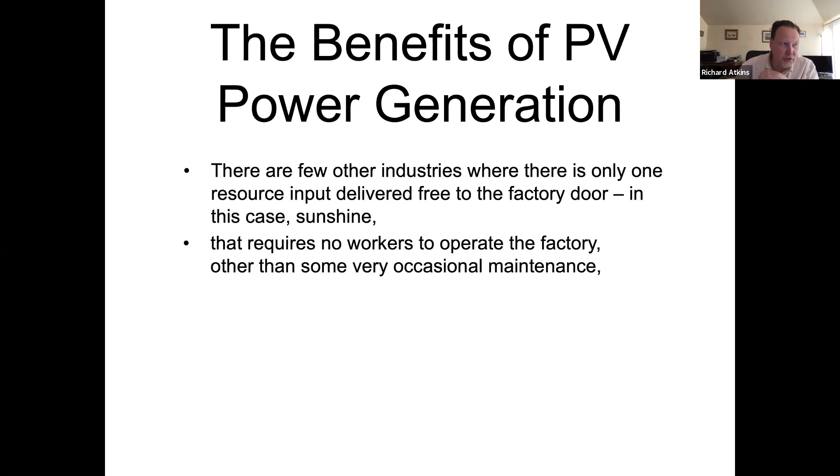So let's start at the beginning. In terms of photovoltaics, it's a fantastic industry when you think about it. What other industry could you be involved in which your raw material, sunshine, arrives free at the factory door? You don't really need a workforce, just occasional maintenance. You don't have any cost to transport your product to the customer. There's no sales, no advertising, you don't need a guarantee. It's unlikely to be returned, and it's very unlikely to fail in use. It's all really good news.

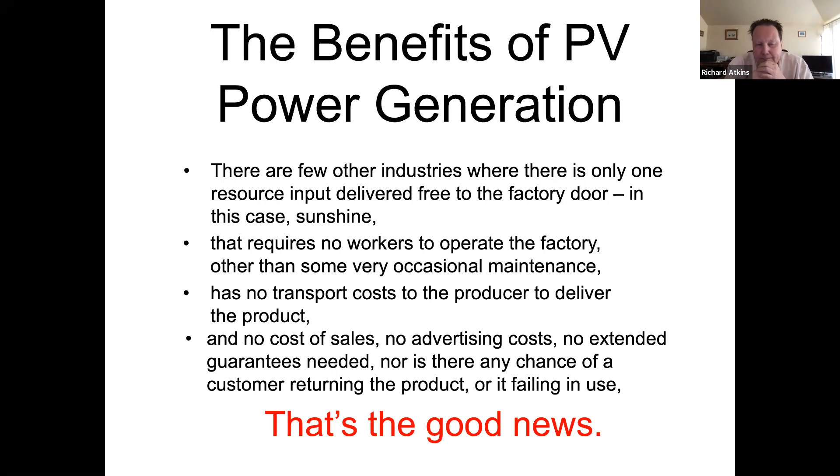But as I was starting to say before, we need to think a little bit about the statistics that go with this, and we'll delve into some of those, all of which are potentially open to question. They always say the only thing you can prove with statistics is you can prove anything with statistics, but I think it's particularly true in the electricity market, which is highly dynamic. The carbon footprint of generation is reconciled every half an hour in the electricity industry, but it's transforming radically over time, and many of the numbers I will be giving you will, by definition, have been out of date when I found them.

Oops. And of course, most statistics are made up anyway, aren't they?

So let's think a little bit about the energy payback period for PVs. I'm hoping two other speakers, Charlie and Emmanuel, will be able to flesh some of this out, because I'm presenting numbers I've found. They're always open to challenge, and we should invite that challenge, because it's all about understanding more, finding out, and keeping up to date. I suppose keeping up to date is the main point I want to make.

So how much energy does it take to make some PVs? Well, for a 1 peak kilowatt array is probably 4 panels, maybe a little bit less than 4 panels. Panels will go from about 250 watts to, you can get them up to 500, but the common ones are around about the 300 mark.

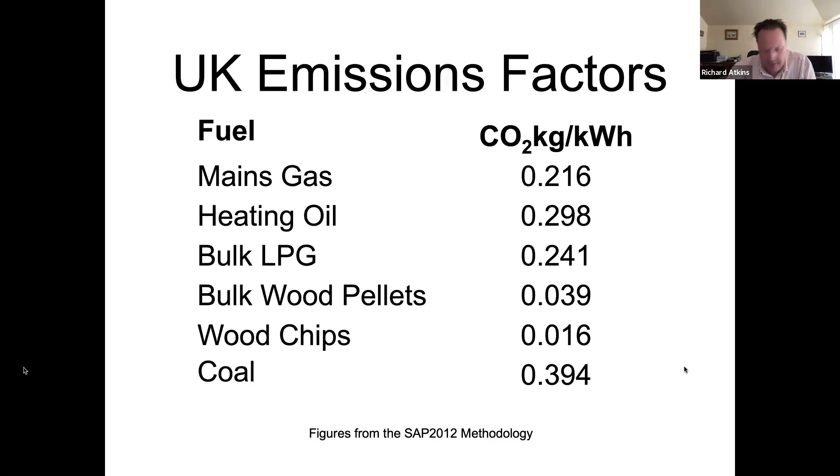But what about electricity? And this gets a bit more complex. So according to SAP, the carbon footprint is about 0.5 kilogram per kilowatt hour, and we're still using that metric. You can see that's from SAP 2012, which is already 9 years old.

But that number was set probably a few years before that in the consultation. There was a consultation on the next version of SAP, which will come in with the next version of the regulations, in fact about 3 years ago, and it suggested more than halving that. There's been a more recent one, which has suggested halving that again.

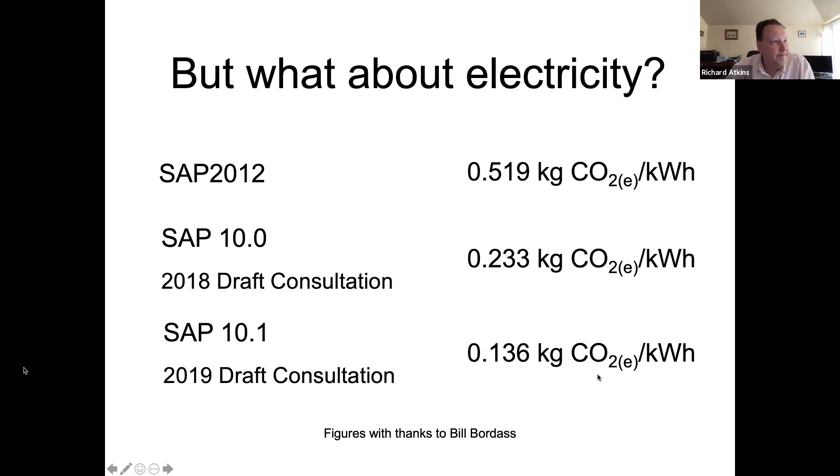But what are the figures in reality? Well, according to the UK government, the most recent numbers I could find from 2019, so again already out of date, it is not far away from what was originally proposed in the next version of SAP. For Scotland, however, our grid, and this is a 2017 figure, is about 1/10 of that. So the Scottish grid is virtually decarbonised already.

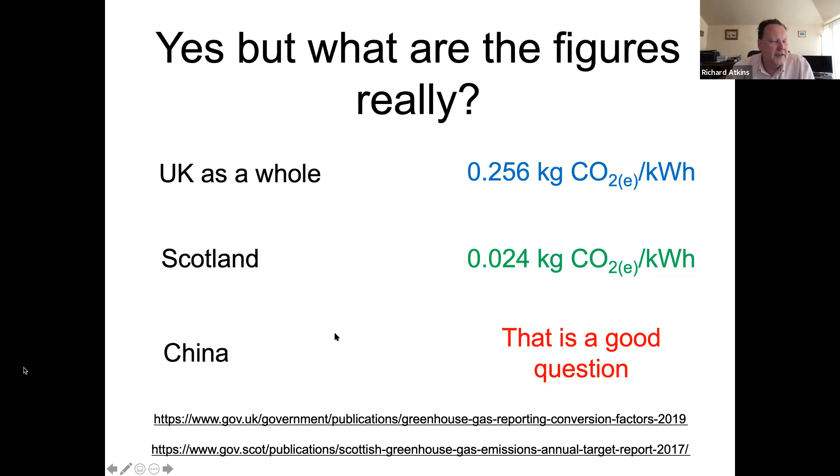What about China? Well, that's a good question, and I found finding the answer to that quite difficult. Why am I interested in the carbon footprint of China or the Chinese grid? Well, I think 2/3 or possibly more of the PV panels produced in the world are currently produced in China.

I did manage to find a paper from 2020 which was looking at the makeup of the electricity grid in China, and that suggests that their electricity grid is about 3 times as heavy, if you like, or has a footprint 3 times the size of the UK grid, which is about 30 times the Scottish grid.

Now, of course, that doesn't necessarily mean that PVs are made only using electrical energy, and I'm hoping that Emmanuel in particular might be able to throw some light on that. But it does suggest that it's a considerably greater carbon footprint.

And of course, if you do the multiplier of that, you get to a fairly frightening 145 years if you're comparing the CO2 emissions factor in Scotland with that in China. Like I say, all of these numbers are open to question.

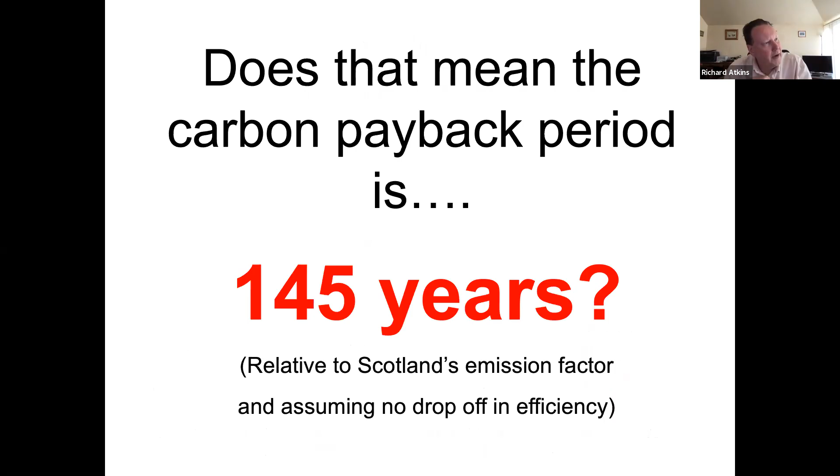I might be out by a factor of 2, 3, 4, 5, who knows. But one of the points I want to get across is we don't have time for a payback.

One of the things that particularly exercises me is when you see lovely architectural projects where somebody says, I've decided to build myself an eco house—a term I absolutely loathe. I'm building it out of concrete, surrounding it with polystyrene insulation, putting PVs on the roof, and therefore I'll have no energy bills and create no carbon. Isn't this wonderful? I look at that and think of all the carbon emissions associated with the concrete, the polystyrene, and the PVs. You may have a zero emissions building in use, but you could have a payback period of 10, 20, 40, 100 years.

If you think about the carbon footprint of electricity for Scotland, it's potentially an infinite payback period. You're actually putting a lot of carbon into the atmosphere right now, and right now is when we don't need it. We don't have time for that payback.

Scotland exports around a third of its near zero emissions electricity. So in a sense, do we need to do any more? Well, yes, certainly, because 78% of the energy we use in Scotland is still fossil fuel based, mainly for heating buildings and transport. Even though we have a very low emissions grid and we're not using all the electricity inside Scotland—and that's another debate about whether we should count just Scotland, or the UK, or Europe, or how big your grid gets—we actually still need more.

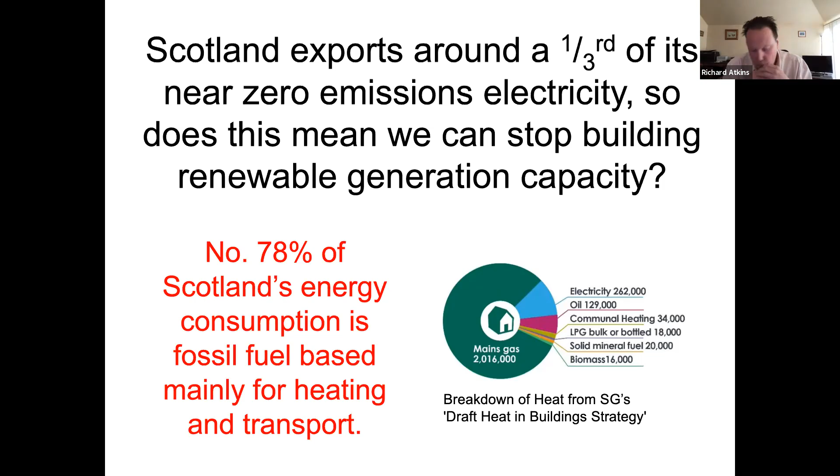So should we just meet that with wind farms, tidal, and hydro? Well, yes. Equally importantly, we should make buildings and vehicles much more efficient.

But there are two other factors. Firstly, the district electrical network was never designed to distribute that much electricity—it was built on the basis that most homes would be using fossil fuels. There's a very great danger the network goes bang if you try to put too much electricity down it. So we do need PVs, and we do need things like electrical storage and other forms of heat storage in homes, in order to smooth out the demand and supply curves, so we're not pushing more power down the network than it can cope with.

But also, all those other things have their own embodied carbon footprint. A wind farm requires to be manufactured and installed, and the same with tidal. If you put insulation into a building, some forms may have an element of carbon sequestration, if you're happy to accept that argument. But a lot of insulation—probably the majority currently used for retrofit—has its own carbon footprint.

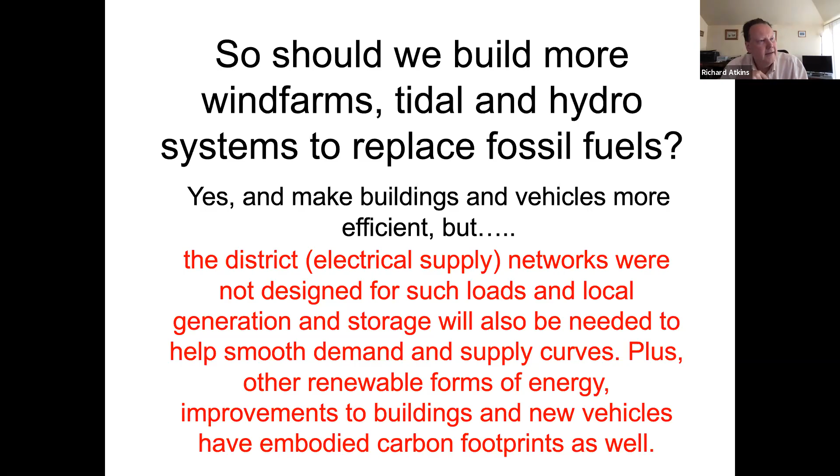So PV still has to be part of the solution. But are there other paybacks we should be looking at? Well, energy, to my mind, is obvious—partly because it's less complex than carbon, since you've taken out the carbon emissions factor for the energy used to manufacture things in different places, move them about, transport them, bring them to the UK, and put them on the roof.

Intuitively, it promotes more efficient panels being made more efficiently. I was reading an article recently suggesting that one of the issues with the market dominance of PVs coming from China is that, because the cost of PVs has gone down so significantly—which on one level is great—it's been a disincentive to develop more efficient panels. So this article was saying less research and innovation is being done to make panels more efficient and to make them more efficiently.

And that may well—Emmanuel may come on to this later, and also in terms of Charlie's talk later, regarding the waste streams that come out of existing and future panels—what's the implication for that?

Are there other paybacks we should look at? Well, carbon, yes, absolutely, possibly. But I would suggest, because I've been asked to provoke a debate, it shouldn't be the global carbon print, it should be the local carbon print. So we shouldn't be looking at the embodied carbon of what is your average PV on the planet, it's where does this particular panel come from and what's its footprint.

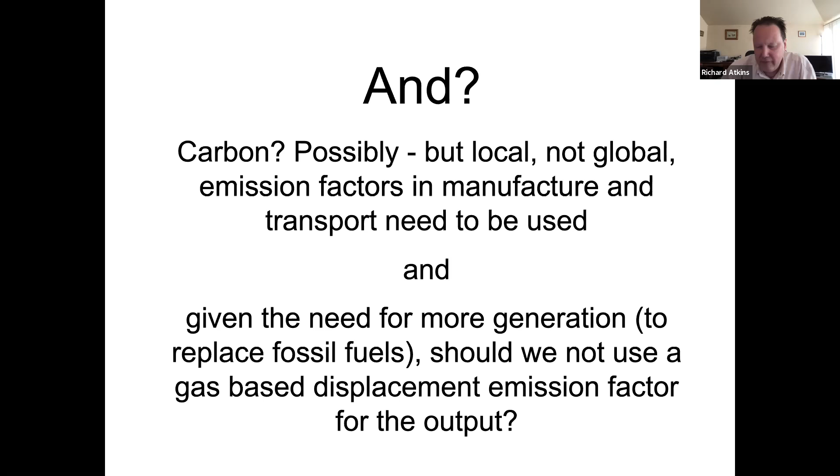Is there anything else we should be thinking about? Yeah, toxicity. It might well be that Charlie and Emmanuel pick up on this in their talks. I don't know the answer to this, what the embodied toxic load of a PV panel is relative to the fossil fuels we're displacing. Cost, well, yeah, obviously cost, and yes, I will come back to that very shortly.

I've only got about another 2 or 3 minutes to go, so I'm nearly done, you'll be pleased to hear.

I think there is more. What's the embodied economic benefit? This is questioning, there's certainly a value in creating an industry for people to manufacture PVs, supply them, and install them. It is creating jobs, but are they good quality jobs? Are they high value jobs? Is the economic benefit being well served, if you like? So that could be a positive or a negative embodied attribute.

You could argue the economic benefit of purchasing and installing PVs is not dissimilar to carbon sequestration of using timber in buildings. It's an activity that's happened which in itself is actually of benefit.

Still more. What's the embodied opportunity cost? Few people talk about opportunity costs, but this is, well, if people weren't in those industries making PVs, could they be making something else that would be more beneficial? Again, it could be a positive or negative attribute. I'm not suggesting I have the answer to this, but I think it's a question worth exploring, bearing in mind if you're in the position of specifying PVs.

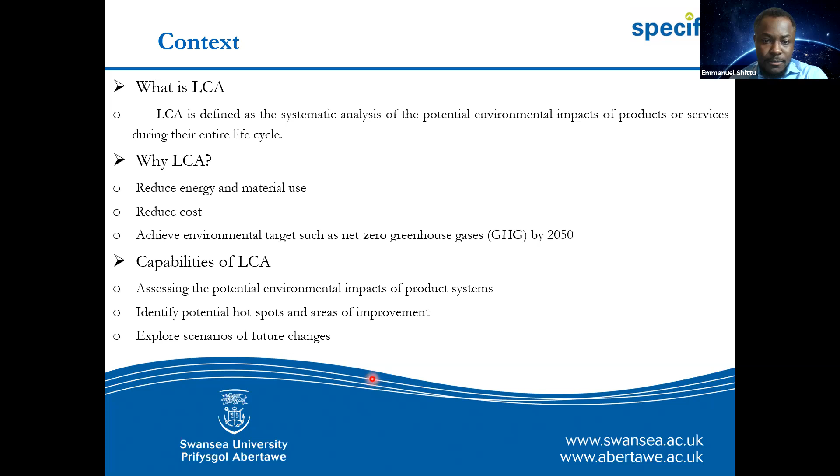So how does LCA work? Just a brief overview: the different life cycle stages usually start from raw materials extraction, so resources, which is within the life cycle inventory, through to manufacturing processes, consumption, energy use, and also recycling, if you include this within your product system.

And then these emissions are what we call a life cycle inventory, such as if we look at global warming specifically, we have greenhouse gases, which include carbon dioxide, methane, and nitrous oxide, and other compounds such as chlorofluorocarbons. These emissions are then aggregated to what we call impact potentials. In this talk, I'll be looking at global warming, specifically global warming potential. So all of these emissions are aggregated to what we call global warming potential.

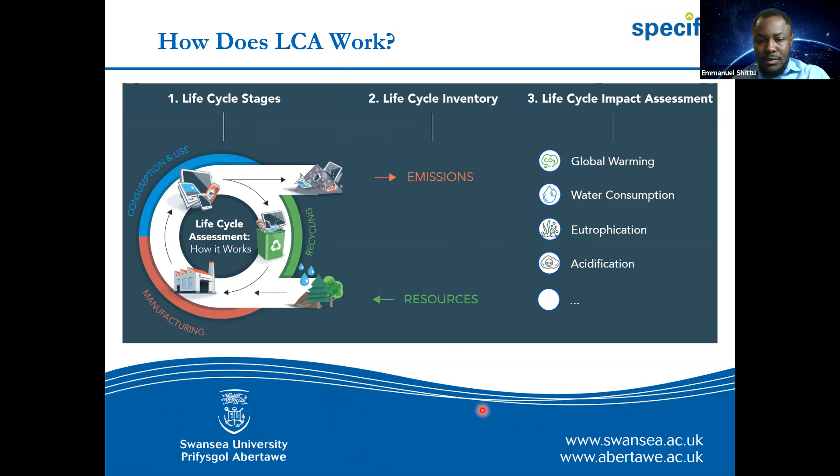The international standards of LCA are these conjoined standards, 14040 and 14044. Essentially, it involves 4 stages of conducting LCA. The first stage, goal and scope definition, is defining the aim, the product system boundary, and the functional units being analyzed - for example, PV delivering 1 kilowatt hour of energy or electricity delivered.

Inventory analysis is when you analyze the material inputs and energy inputs into the system, which are aggregated into impact assessments such as global warming potential. And then the interpretation depends on what the person conducting the analysis is intending to do with these results.

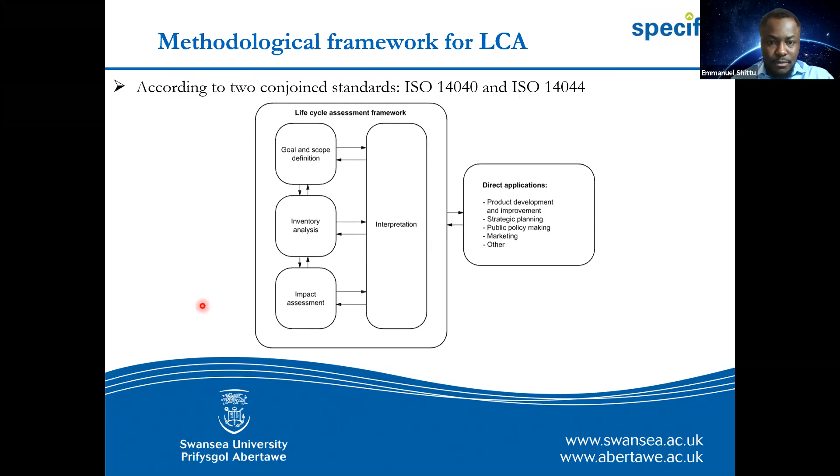A recent report was published by the International Energy Agency on the role of critical materials in the clean energy transition. The report shows that crystalline silicon is expected to be the dominant PV technology as we transition towards net zero global warming by 2050, with some technologies such as perovskite gaining a significant share of the global market.

So to that end, because crystalline silicon PV will be heavily involved, I will be showing you some key results of the environmental impact of crystalline silicon PV.

A key question to ask is, why do we need to conduct LCA analysis of PV? I've identified two key reasons: understanding the implications of the global production shift to China, since we've seen a gradual shift in global production to China from 2005 to 2019, with China now holding about 71% of production globally; and critically assessing the environmental impact of the production of PV from cradle to grave, essentially from resource to end of life.

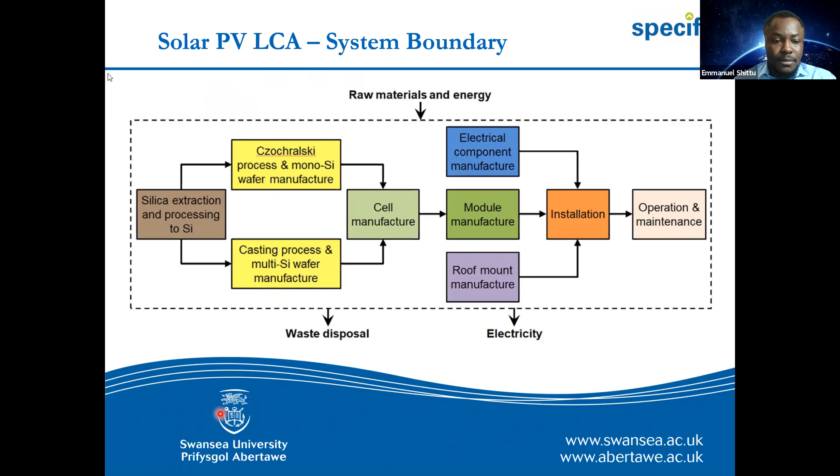How does solar PV fare with other renewable and non-renewable energy systems? Solar PV's environmental impact in terms of global warming potential is significantly lower than non-renewable energy sources, but slightly higher than hydropower, wind, and nuclear energy.

So it is important to understand where the environmental impact of crystalline silicon PV is actually coming from, and LCA would help us identify some of the hotspots.

This figure on the left-hand side shows a comparison of modern and reference monocrystalline solar PV. Initially, I mentioned the transition of global production from Germany to China. In 2005, the global warming potential of PV was close to 90, but it dropped by almost 45% by 2015 for PV made in Germany. This is essentially because of technological improvements, which are key as we move forward in terms of improving manufacturing efficiency and increasing recycling within the PV manufacturing process.

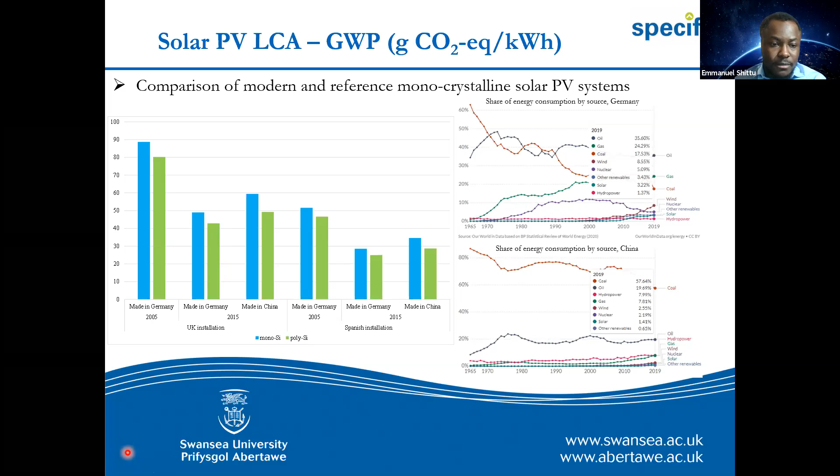This then raises the question of how we can improve the impact within this manufacturing process, which leads us to consider the key manufacturing processes being used in China, and how the energy mix, for example, can be improved such that the environmental impact at the production stage can be addressed and mitigated.

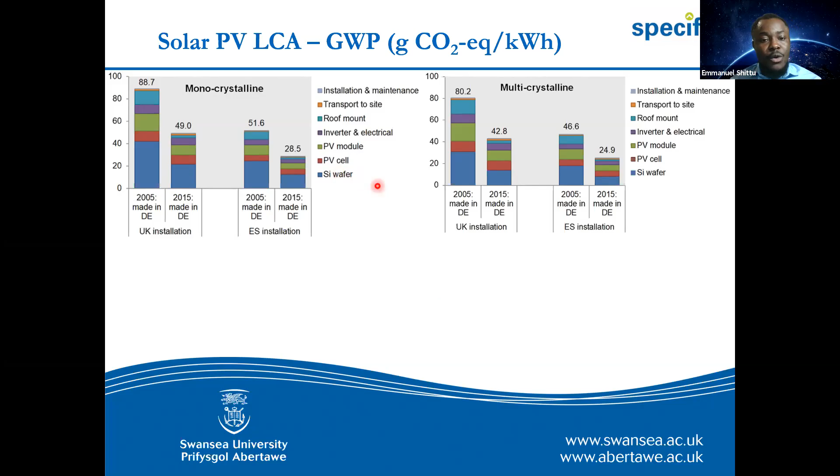An additional slide here is showing how we know that the penetration or integration of renewable energy systems into the grid requires storage. So as we increase the amount of renewable energy, so does the required amount of storage.

This figure is essentially showing that even after including the storage, the environmental impact of PV compared to conventional thermal, such as natural gas combined cycle or diesel generator, is still significantly lower than the conventional technology for different solar radiation levels. For example, the 1,000 kilowatt hours per meter squared year for UK is also representative of Scotland if the PV is at an optimum tilt angle.

So this is static, and why we see a slight increase in the environmental impact of PV due to energy storage, overall it's still significantly lower than conventional thermal systems. This is where the discussion comes in as to what system boundary you need to include - just look at PV, or PV and storage, or PV and storage compared to the grid or energy system that the PV or renewable energy is displacing, in order to have a bigger picture of the environmental impact, benefit, or cost.

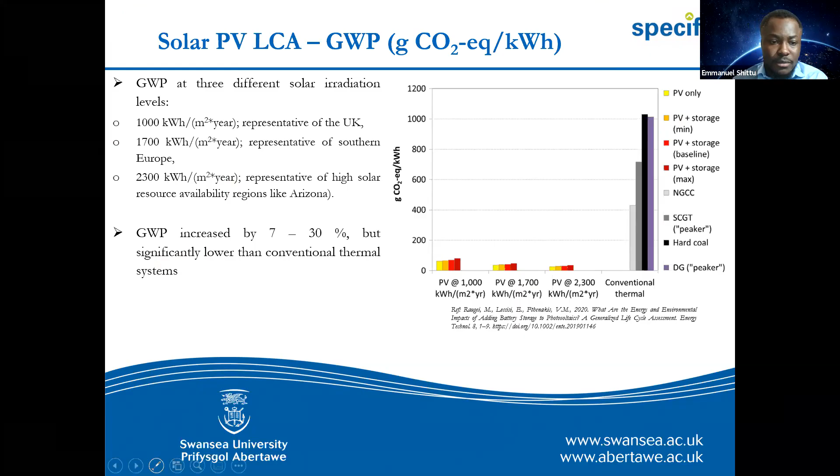I think Richard talked about the energy payback time. These are based on literature data. For PV, Richard mentioned 4.5 years, so that's right around there. For PVT, photovoltaic thermal system, which produces electricity and thermal energy, because of the high efficiency, the payback time is 1 to 4 years, which is quite lower.

For greenhouse gas emissions payback time, this is actually an area that hasn't really been looked at a lot in literature. For PVT, we see a greenhouse gas payback time of about 1 to 15 years, and we expect PV to be either slightly higher than that, in that range.

This shows positive news in terms of, if we're looking at the life cycle of a PV of 25, 30 years, about 50% of the time, hopefully we can get the greenhouse gas payback time. But further study is still needed in this greenhouse gas emission payback time.

So just to round up the key conclusions I can draw from this presentation, from this research: the key hotspots in the life cycle of solar PV are attributed to PV production, mainly in silicon wafer manufacturing and its upstream process. However, talking about the previous capability I mentioned, understanding that if this is the hotspot, how can we then improve this? One way is essentially through technological improvements and manufacturing processes.

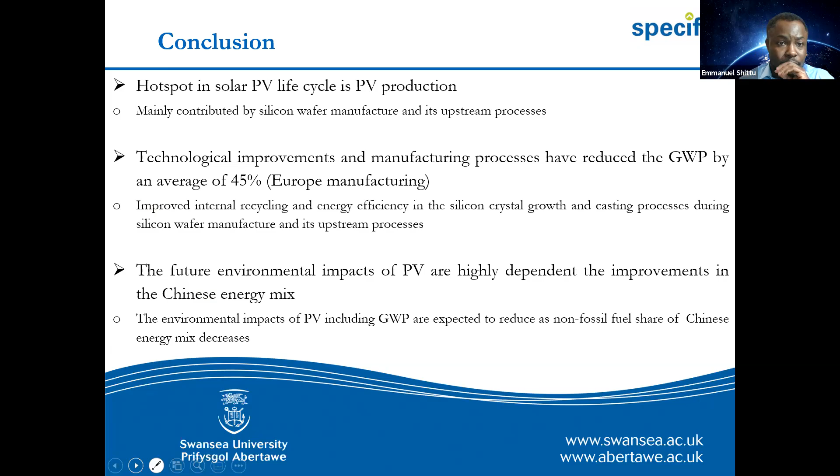Which brings me to the end of my presentation. I think I've mostly been showing, I hope I've been able to show how you can use LCA to understand environmental impact of solar PV, well, not just solar PV, but any products and services that you're hoping to use or produce in the future. Thank you.

Thank you so much, Emmanuel. That is very illuminating and clear. It's also packed full of information, shall I say.

If I can get this thing moved away. Yeah, okay, right. Control panel. Okay. Okay, so this aside.

Okay, so as I mentioned, my name is Charlie Farrell, PhD student based in Queen's University Belfast. I'm currently working with a local college in Northern Ireland called Southwest College, which is involved with lots of European projects and also involved in a lot of renewable energy projects as well. So I am a PhD student on a project called Renewable Engine, which is to facilitate the innovation gap between academia and industry, so company sponsors.

We are partnered with the Research Catapult in Strathclyde, the Advanced Forming Research Centre, with some other partners down in the Republic of Ireland, the Institute of Technology Sligo, and again, Southwest College and Queen's University Belfast.

So my PhD is looking at effectively PV recycling. So I've been looking at first generation PV, so mono and polycrystalline panels. My talk outline is just going to run over a few points, and I'll also include some supplementary material as well.

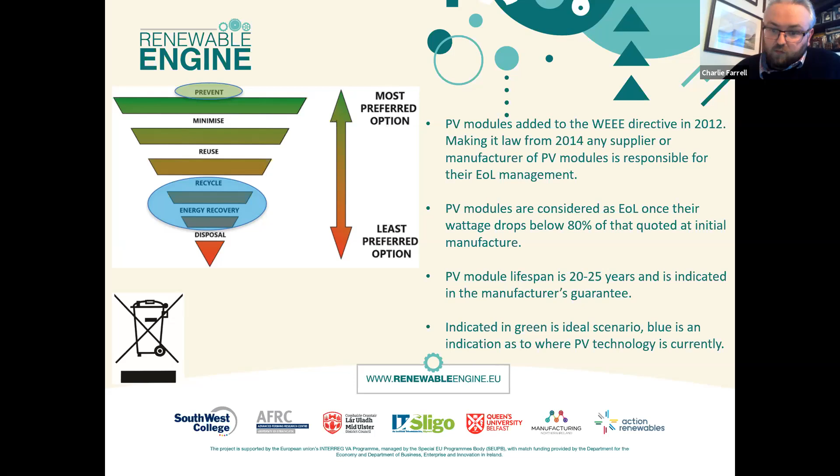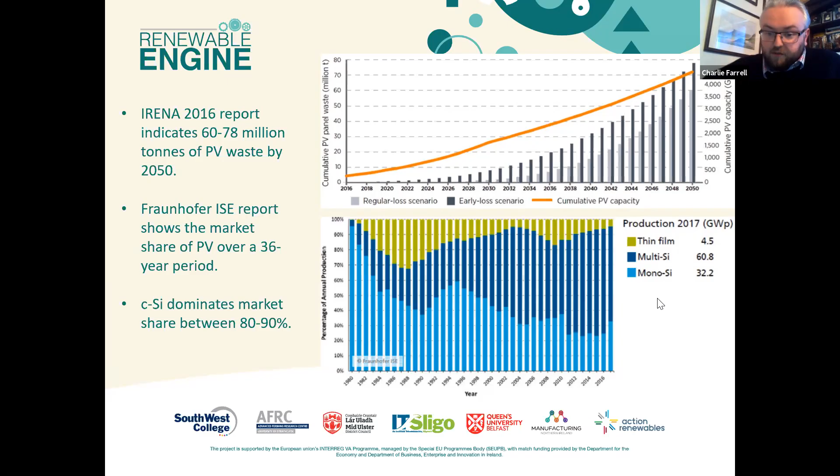So there is a current method being used in industry, which involves the crushing and shredding of PV modules, which effectively will break up the silicon solar cell. Then to recycle that particular constituent, you have to look at the likes of hazardous chemicals. You also have to look at resmelting the silicon once it's been cleaned with hazardous chemicals as well, to form more silicon ingots, and then energy employed to cut the ingot to make cells again.

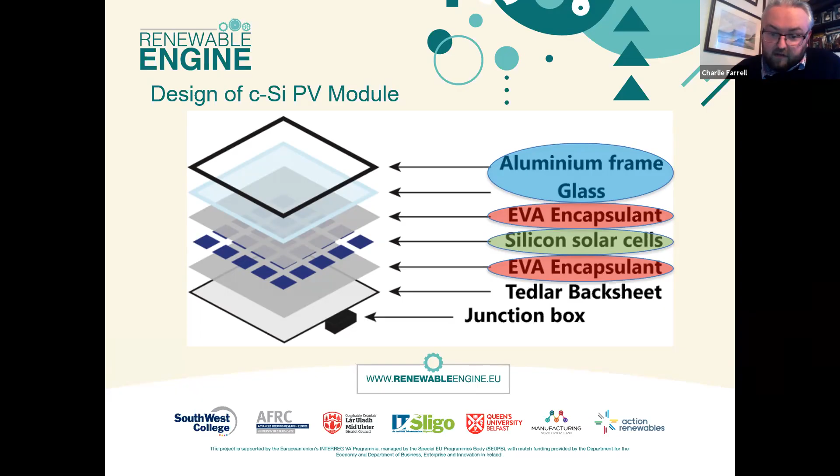So the ideal scenario when looking at recycling these panels would be to look at recycling the silicon solar cell intact, if at all possible. I'm just going to run through some research innovations later on in the presentation as proof as to how these can be recovered intact, and with the likes of electrical efficiency, they can be reused again for remanufacture.

As I mentioned in the previous slide, the first step is effectively the removal of EVA, the encapsulant used in PV modules. It's been the industry standard since the early 1980s. They used to use a polymer called PVB, polyvinyl butyral. The solar grade EVA has roughly 33% vinyl acetate content by weight.

So the vinyl acetate part of the polymer is this section here, where you can see the letter M, and then obviously 67% ethylene, which is over here. So EVA, polyethylene vinyl acetate, is the full chemical name. Again, my background's in chemical engineering, so bear with me, this is a bit of light chemistry here.

So yes, it's been proven to be the most difficult step to recycle PV. And it's been used in the industry specifically for two reasons. One, it's cheap, very affordable in the manufacturing process. Two, it has excellent adhesive properties to the front glass layer and the back sheets used in PV modules.

So there are multiple types of recycling that can be used for PV modules, reported in literature, academia, and even in some industrial reports. These include acid etching, organic solvents, shockwave recycling, and thermal decomposition. There are significant drawbacks to some methods, like acid etching and organic solvents, where there's a high cycle time, but also hazardous wastes that are generated, and emissions as well.

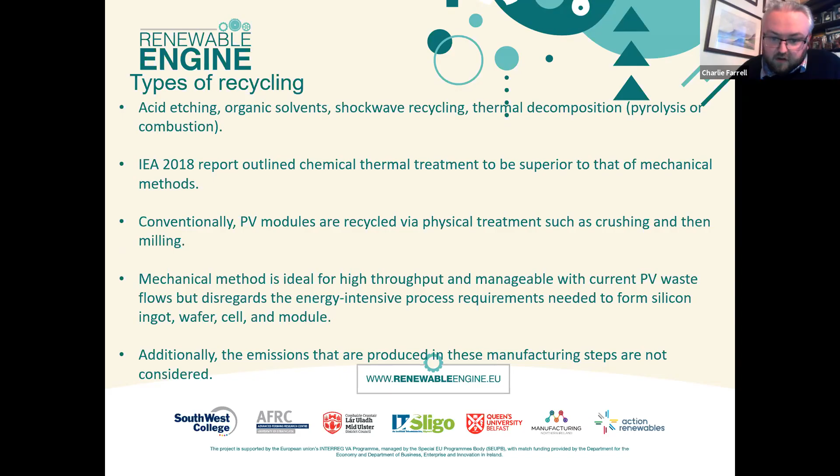So the mechanical method is ideal for high throughput and manageable with current PV waste flows, but disregards the energy intensive process needed to form the silicon ingot, wafer, cell and module, which Emmanuel had briefly touched on as well. Another thing to mention is the emissions produced in the manufacturing steps, such as silicon production, are not necessarily considered when looking at physical recycling methods.

So one area of our work that was published in 2019 looked specifically at the energy inherent in some of the constituents in PV modules. We looked at specifically used PV modules, and looked at pyrolysis and basically calorific studies to look at the energy in the waste plastic.

So we know that waste plastic can be used for energy. It's a fairly mature process with regards to pyrolysis. It's been done with lots of different plants around the world even to date.

But what we wanted to look at was specifically that EVA layer, which hadn't necessarily been looked at in literature. We got gross calorific values of the used encapsulant, and we compared it to virgin grade EVA as well.

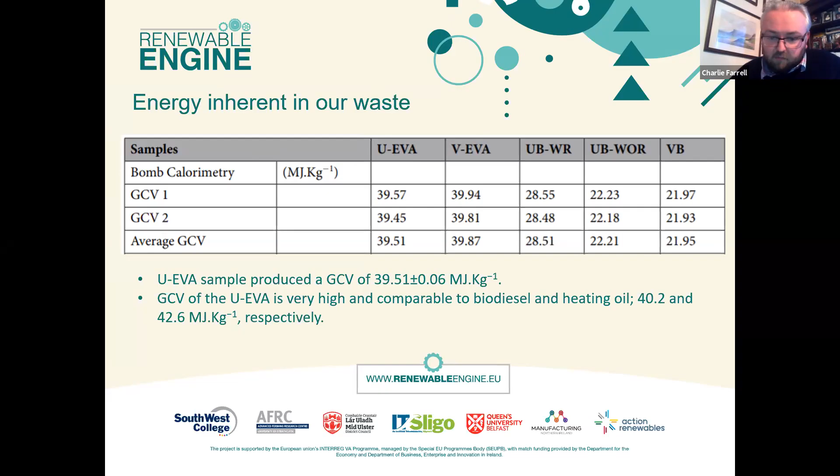We wanted to see if there was much of a change, and the change was quite negligible between the used EVA, which is UEVA, and virgin EVA, V-EVA here, the polymers. They were quite high and comparable to the likes of biodiesel and home heating oil, which isn't surprising considering it's basically a hydrocarbon. So it consists of carbon, hydrogen and oxygen molecules as well, and is petroleum based.

Looking specifically at weight constituents of PV modules. This is just a part of a table that I included from our review paper that was published last year, looking at different sources on the different fractions or constituents in the PV module.

The weight percentages of the glass and the aluminium frame are quite high there for two different references that are, I think, about seven or eight years apart, I can recall. But what I wanted to highlight specifically with those two constituents is the annex that talks about the targets for the Waste of Electrical and Electronic Equipment Directive.

As of August 2018, there's a target that 85% should be recovered, and 75% should be prepared for reuse and recycling. If you look at that percentage and add up the glass and the aluminium frame, you can see that that actually meets that threshold.

So the other materials, like the silicon cell, although it only contributes a very small amount to the actual weight percentage of the module, don't necessarily have to be included to meet those targets. But considering the amount of energy required to make silicon wafers, when you're looking at something like the Siemens process, which Emmanuel touched on in one of his figures...

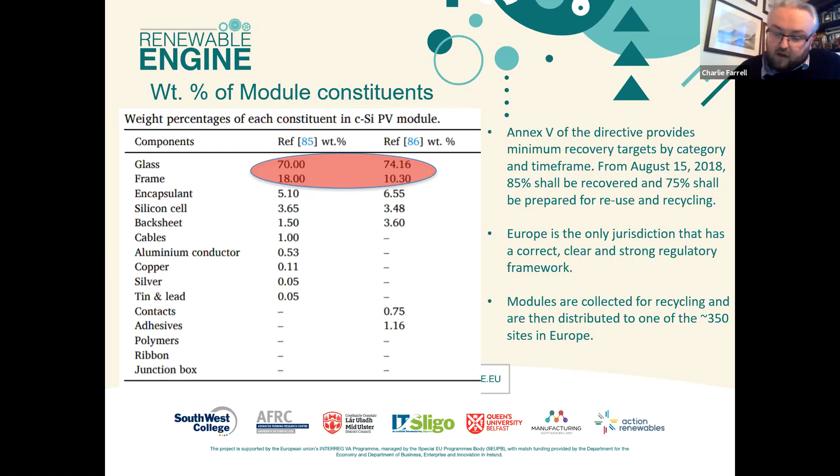But again, a lot of the LCA data and a lot of the recycling studies fail to mention the emissions that should be included or regarded with regards to the transportation of specific constituents and the transportation of specific wastes to specialist recycling centres.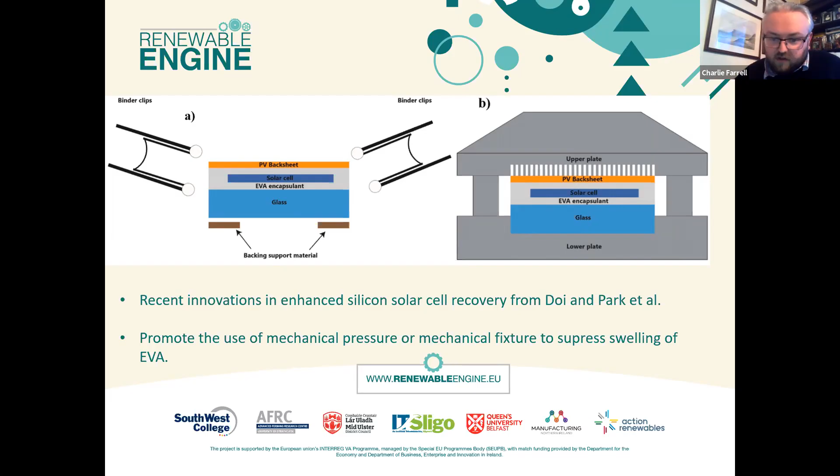They tested rebuilt modules in a publication in Green Chemistry, I believe in 2018, showing the electrical efficiency differed by only 0.1% after the recycling process. So although the manufacturer's guarantee is 20 to 25 years, if you can recycle these silicon solar cells and rebuild new modules, you're effectively doubling that lifespan. The problem is that with some failure modes, you get yellowing or degrading of the EVA encapsulant, which lets less light in over time, dropping the wattage below 80%, and these panels are then considered end of life even though they're not.

The other piece of our work, specifically looking at the pyrolysis of EVA, was examining how cleanly it would delaminate the panels. There was a lack of information on how far the reaction would go to completion and how much residual material would be left over post-pyrolysis. Pyrolysis promotes clean delamination because it doesn't use oxygen - it's an inert process, so you don't get oxidation or burn damage on the cell or wafer. As the pyrolysis process occurs on the EVA fraction, you're left with about 1% residual weight after, so it's a relatively clean process in terms of how far it goes to completion.

As I mentioned, EVA is made up of hydrogen, carbon, and oxygen - mainly hydrocarbons. So if used in a closed process, you can harness the energy from these plastics, whether for delaminating further modules in a concurrent process, or using that energy elsewhere. One particular study, not looking at pyrolysis but at combustion, used that energy to help heat water and utilities on site at a pilot recycling plant a few years ago.

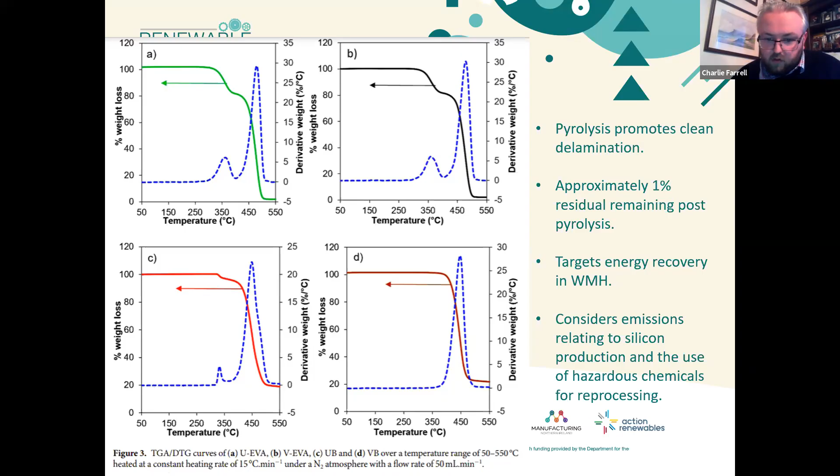Some of the other polymers, like back sheets, are significantly trickier to recycle because you're left with approximately 20% residual weight. This little red curve here is one of the back sheet samples, and if you read it on the left-hand side, you can see it's about 20% residual mass left over. So there's some work I'm currently doing looking at that as well, with regards to emissions and how to effectively recycle them.

From the review paper, we looked specifically at the PV industry - how many publications had actually quoted and examined the United Nations Sustainable Development Goals with regards to the PV industry. We found there wasn't a whole lot of literature out there.

So what we did was encompass all the goals that we felt would be met if proper recycling infrastructure was brought into the PV industry, looking at concepts such as eco-design, where you could reuse or remanufacture a module from legacy panels. The top goal at the hierarchy is responsible consumption and production, which would then facilitate and feed into other goals such as sustainable cities and communities, and decent work and economic growth.

There's actually a report, the IRENA report, which basically breaks down the economic value for the recycling industry, looking specifically at recycling PV, and how much economic growth there would be in that area by the year 2050.

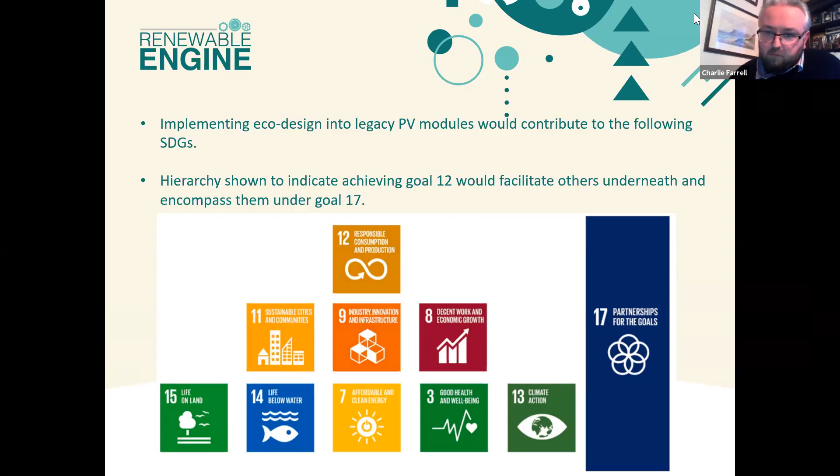I'm sure some of you would be familiar with this particular diagram. This is basically a butterfly diagram, made famous by the Ellen MacArthur Foundation. We developed one of these looking at the different processes from the extraction of raw materials and mining stages all the way through to end-of-life treatment, landfill, and exportation of waste.

So the ideal circular model in this case would be repair and maintenance of PV modules to go straight back in for use, consumer use.

But at the moment, with the current recycling methods in industry, with the likes of PV Cycle and how they mill down the modules and basically break up the silicon cells, you're finding it's going down to your C1 model, where it goes into the recycling process again right up the top of the manufacturing chain - having to go through smelting, cleaning, and re-smelting to make silicon ingots, then cell processing again and the lamination process. So there's a lot of energy to consider, as well as the emissions with these subsequent processes when looking at the life cycle of PV systems.

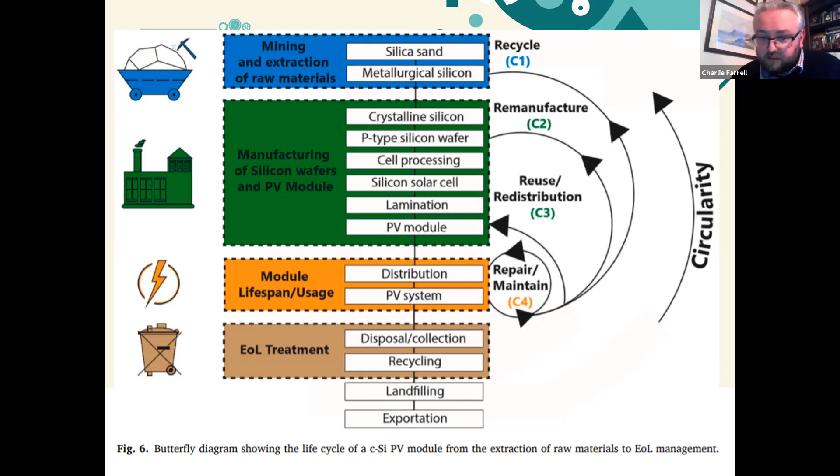This is just my last slide here, really. This is looking again at circular models for the PV industry. With my work, I'm looking at harnessing some of the energy from the polymers included in PV. Scenario B and scenario C are looking specifically at energy, whereas material is indicated with the black arrows.

My work is effectively trying to develop model C, where it's using the energy inherent in PV modules to be recycled in further delamination of modules, or the heat effectively just being used again to keep the process heated. With this process, it runs a lot lower than the silicon manufacturing process.

The pyrolysis of the polymers has been proven to be carried out to completion at about 500 degrees C, whereas the silicon process can go up to 2000 degrees. When you're looking at the likes of the ARC process, it's like 2400 degrees C.

Scenario B is looking at open loop energy recycling, which I mentioned previously. One publication looked at closed combustion of some of the PV modules and using the energy to help heat utilities such as water on site.

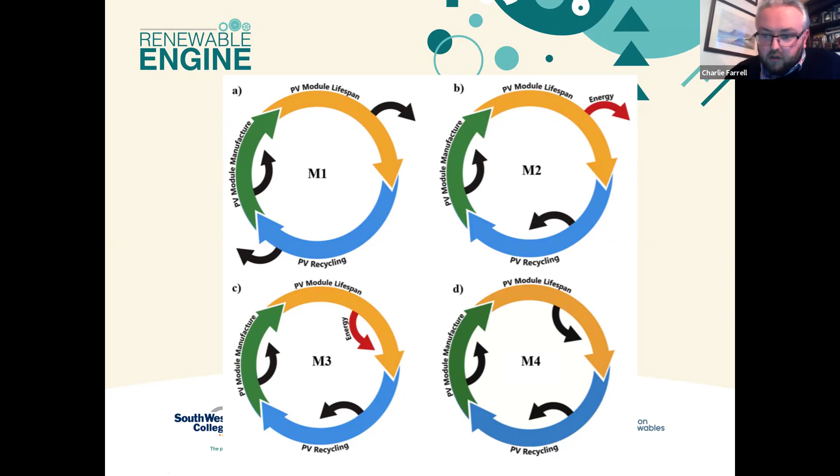Model 1 is open loop material recycling, where some of the materials such as the aluminium frame would be used in general aluminium recycling, or the glass layer would be recycled for general glass recycling such as cullet.

Although we have green options now, we have to keep reiterating the design of these particular green sources and how they're going to match up with more stringent targets as time goes on, like the Paris Climate Agreement, the WEEE, and different things like that.

As I mentioned, there are open access publications on the review of PV recycling, looking at all the different methods, both academia and industry, and some lab data looking at the energy characteristics of the polymers and the PV modules, published with the Renewable and Sustainable Energy Reviews Journal and Nature Scientific Reports. They're open access, anybody can access them.